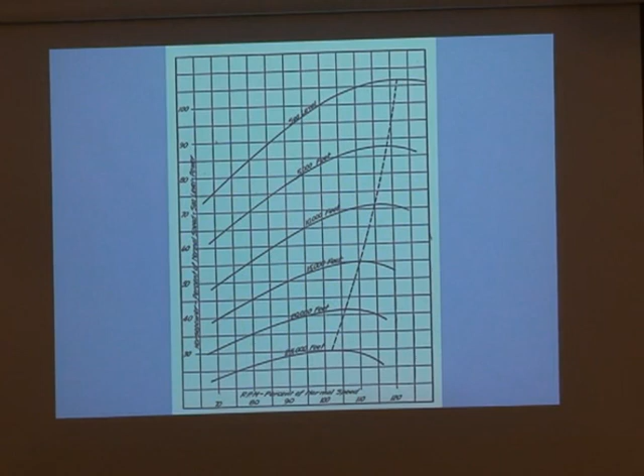Here in the UK, we have a very interesting pioneer. In October of 1909, George Mort in Willesden, a borough of London, was doing engineering for the New Engine Company. He lodged a patent on a two-stroke engine. I know you're familiar with the difference—a two-stroke has a power pulse every revolution, as opposed to the four-stroke where you have a pulse every other revolution. It's a quite sophisticated two-stroke concept.

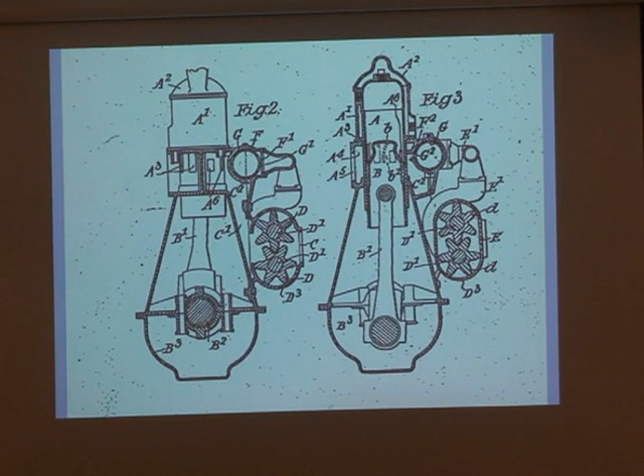One of its features is the use of a blower, akin to what we call a roots type blower with intersecting lobes. It looks a little bit like an oil pump or something like that, but you can see the blowers there at the side of this engine. This is a concept that Mort brought into the metal in an aviation engine.

His actual engines, starting around 1910, had 4-lobe rotors. So you saw in the patent days he had a 6-lobe rotor, but he used that—this is quite an efficient roots type blower with four rotors, in fact.

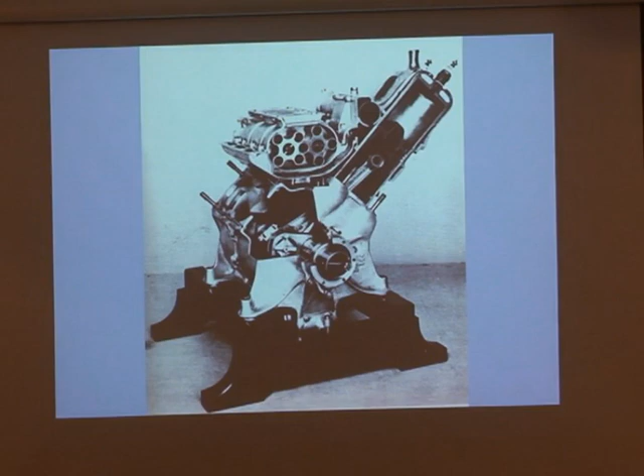The engine was very sophisticated in that Mort used the blower to bring air into the engine, initially to scavenge the gases from the previous stroke, and then he used a rotary valve to pump a rich mixture of air and fuel into the engine at the very last part of the induction stroke. So the rotary valve played an important part in the way his engines operated. Here's another view of a cutaway NEC engine.

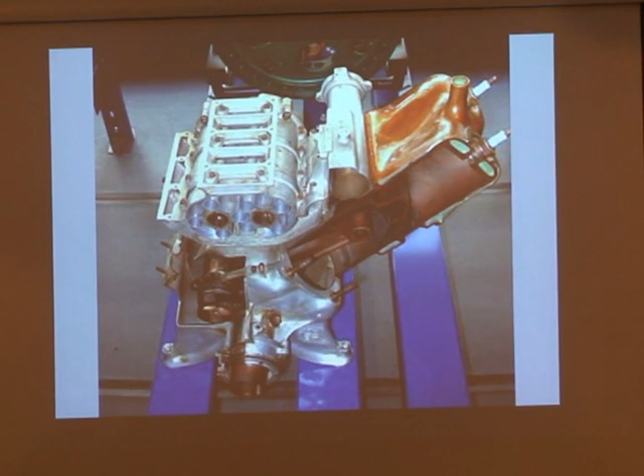Mort and the NEC produced engines of a number of different types in the years running up to the war. They had inline configurations—we see an inline 6 here—and he had 4s in V and inline versions. These engines developed power from around 40 to around 100 horsepower. A very interesting early use of a blower.

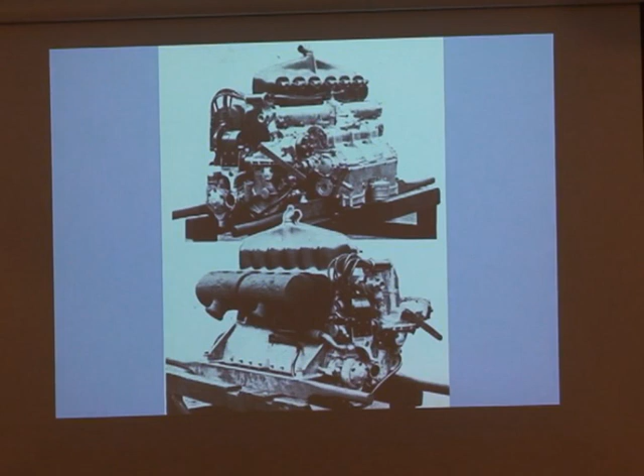There was some supercharging effect from the way the ports and the rotary valve were organized, but not a lot. The objective of the blower here was not supercharging per se—it was for the performance of a two-stroke engine. But as you can see, a very sophisticated and interesting design. The engines did get some use, but the war intervened, and Mort's engines were too small, really, to be important in military terms.

So he produced power units, parts for power units for other manufacturers during the war. Now, around 1915, as the war got underway, it became evident to people on the front that against the German aircraft of the time, the Allied and British planes were viewed as Fokker fodder. The Fokkers were too tough. We couldn't get to grips with them.

And one of the ways in which Britain's engineers thought to deal with this was to start thinking about a supercharger of some kind. This work was done by the Royal Aircraft Factory. Britain at that time had a government company which designed and produced engines and aircraft for the military as a national activity, and to their credit, the engineers there looked into various different ways of providing a supercharger.

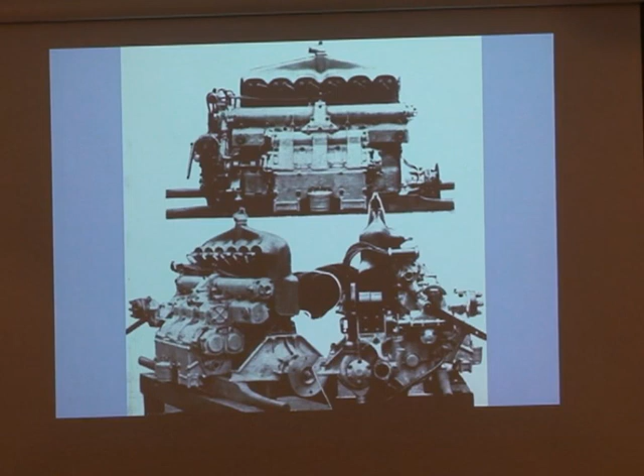Now, the centrifugal type supercharger has the advantage of being very efficient. It runs at extremely high speed relative to a typical aircraft engine running at 2,000 RPM. Your centrifugal blower will be running 16,000, 24,000 RPM, because it gets its pumping ability from the inertia that it develops in the air that's going through it.

And so it's very peaky in its performance, which is historically why it hasn't been very interesting for cars or even racing cars, because it doesn't give much boost at low speed. But in an aircraft engine, which is running at a fairly consistent speed, a centrifugal supercharger is quite good because you can match the blower to the engine, and you're not going up and down the rev scale all the time.

But this is basically the blower that the Royal Aircraft Factory designed for testing on their V8 engine. That was designed by Jimmy Ellor. Jimmy Ellor, E-L-L-O-R, is a kind of leitmotif through this whole story. In Britain, he became an outstanding designer, creator of superchargers, and this was basically Ellor's first effort. You can see the step-up gears that are needed to get the supercharger up to the kind of speed that is necessary.

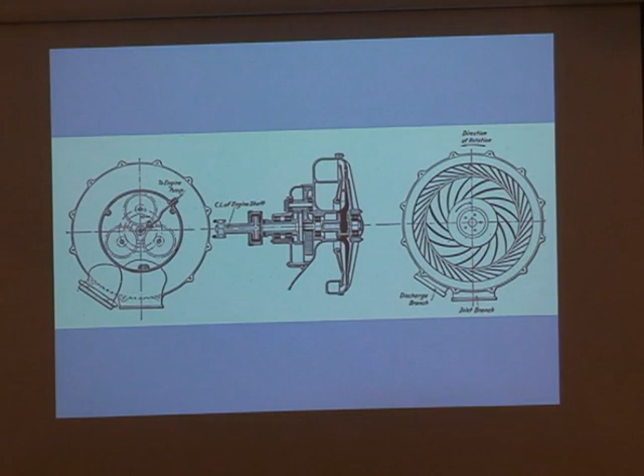In January 1916, this supercharger unit, driven by a shaft from the back of the engine, and I should add, blowing through the carburetor into the engine - the British decided that that was the best way to do it. The French didn't - sorry, let me correct that. At this stage, they were blowing through the carburetor.

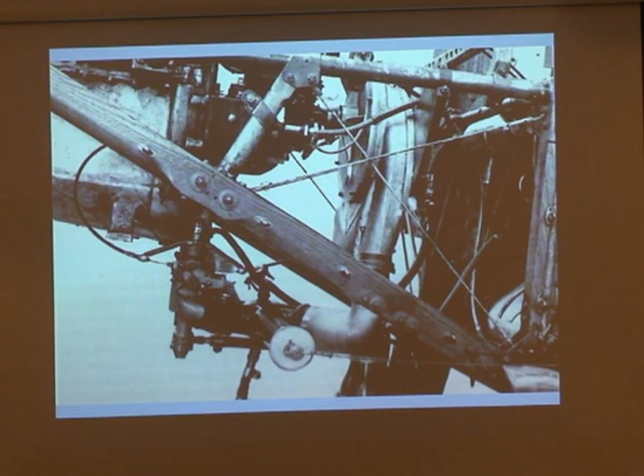Later, they changed that and drew from the carburetor, which is generally speaking the best way to do it. This shows the test unit in January 1916, and as far as I can ascertain, this is the first compressor-aided aircraft engine to take flight. Nobody - French, German, Italians - beat the British to this honor.

Sam Heron was another engineer involved in these developments, and he said the observer in the BE-2 biplane sat in the front seat with his feet under the fuel tank. The gear drive for the supercharger was also close to Eller's feet, as you can see here, the observer. The gears were quite inadequate and the pinion failed in flight, producing showers of sparks and a feeling of distinct concern.

They were discovering that the inertia, because of the high RPM of the centrifugal blower, was substantial, and that in fact the task of driving it was no less demanding than driving the propeller of the airplane. So this is something that took a little while to sink in, that this was something that had to be paying attention to.

The British, at this point, were pretty much committed to mechanical drive of the centrifugal blower. In France, Auguste Rateau had been a terrific pioneer of turbine-driven centrifugal blowers for aircraft. In fact, he was really the first to build small turbine-powered units for aircraft use, using the exhaust of the engine to drive the supercharger.

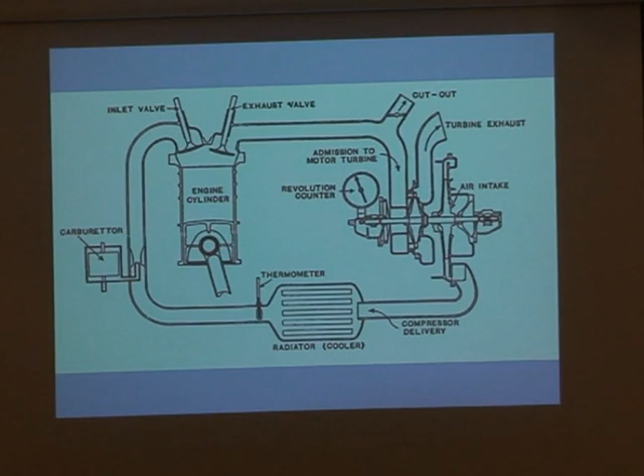Now they had this practically ready when they found out that Rateau had some equipment available that they could use. So they commenced testing with a Rateau system. Rateau was pretty happy to let them do that. He said he'd like them to do it in France, and then they said no, we prefer to do that at home. They did carry out testing with the Rateau system.

But there were problems. There were failures of the pipework, failures of the blower. There was another reason. One observer said one of the problems is that the festoons of red-hot exhaust pipe from each cylinder to the turbine were considered too alarming to the pilot. It was, in those days, quite a lot of pipework around. And the exhaust valves, of course, were suffering with the turbine back pressure and so forth, and the heat that was generated. So that represented a backpedaling by the British investigators. They decided that turbocharging at that time wasn't quite the way to go.

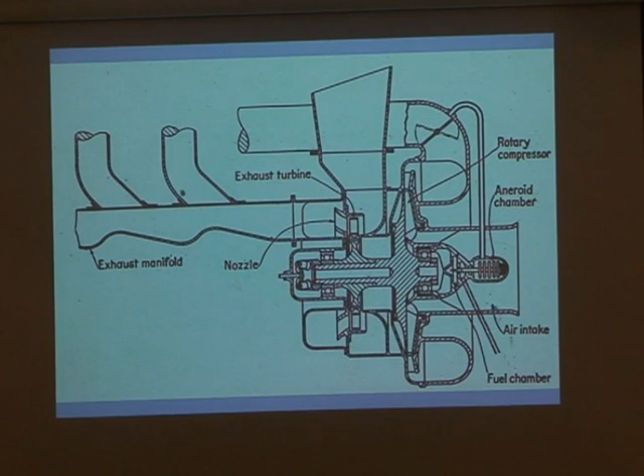We have another important pioneer. We all know the work of Harry Ricardo, a very important engineer in terms of new developments in technology, engines in particular. Ricardo went to the War Office with ideas about how he could make engines that would perform better at high altitudes and so forth. He said the officer he went to see listened to me very courteously, and then said he was afraid I was wasting my time. The Army only required aircraft for artillery spotting, the officer informed him, and for this purpose an altitude of only a few hundred feet was all that was needed. In fact, captive balloons were the answer, he was told. So Ricardo got a very dusty response from the Army at that time.

But he did complete a type of supercharging, which he himself admitted was not unlike something that Dugald Clerk had developed in the 19th century. He in effect added a stage below the main operating cylinder in which a pump effectively brought in, with a certain level of timing through ports at the bottom of the cylinder, and with a bit of an intercooler along the side, a form of supercharging integrated with the engine itself. He did manage to test this engine. He got a boost pressure of about one-third of an atmosphere, and significantly increased the engine's power from 21 to 31 horsepower. So it worked, which is not surprising.

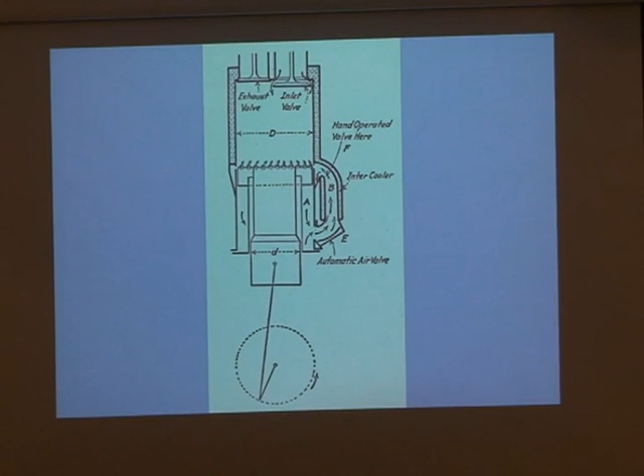The stages to put it into actual use were difficult. He had a project to do a V12 engine that didn't get done in any reasonable time. But at Beardmore, Frank Halford redesigned the company's engine to use Ricardo supercharging, and this did succeed in increasing power from 230 horsepower to 260.

One of the disadvantages for an airplane is that the height of the engine was daunting to the pilot, very difficult for his vision. They did produce ultimately an inverted version of this engine, which got over that problem. This didn't get into practical use during the war, but it was, in its way, a fruitful avenue for exploration.

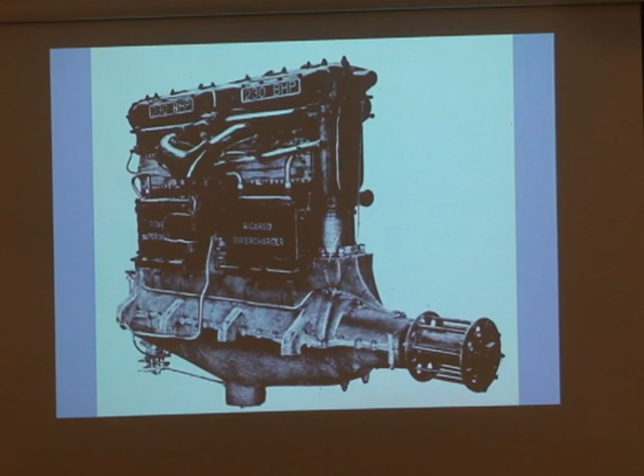Another player was John Davenport Siddeley. He was described as a man accustomed to having his own way, noted for being both energetic and somewhat autocratic. The Siddeley Deasy Company was working on aircraft engines during the war. After the war, a series of amalgamations led to the creation of Armstrong Siddeley.

In 1917, the Royal Aircraft Factory that I mentioned earlier was dissolved. This was not seen by the government as a really good way to be developing engines. Having a government body that was both designing and producing them, they thought it better to rely on aircraft engine producers, get them to do the work, and do research at Farnborough, where they were based.

When that happened, Frederick Green, who had been leading the effort at Farnborough, and Sam Heron, whom I mentioned earlier, brought to Siddeley a 14-cylinder, two-row radial engine that they created at the RAF, Royal Aircraft Factory, which at that time, 1916-17, had a built-in centrifugal supercharger. So they hadn't really completed the engine, wasn't fully tested, but it came to Siddeley.

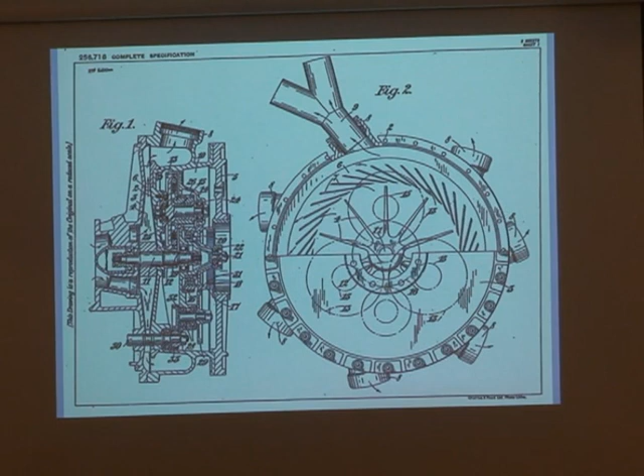This was the first engine to be made commercially available with built-in supercharging by anybody. It was a very important pioneering effort by Armstrong Siddeley. Just a couple of details of the design.

This shows the input drive to the blower from the engine. It's a kind of nest of inner and outer gears and pinions, which were designed to accommodate any difference in angle or position of the elements of the supercharger in the engine.

Slipping clutches were coming into use because it was evident to designers, after much tearing of hair, that it was necessary to have some form of device that allowed slippage in the drive line up to a centrifugal blower. You can see 4 different clutches, spring-loaded, but aided in their grip by centrifugal forces, and the planetary drive for the blower in this Jaguar engine had these clutches in all 3 of the epicyclic drive to the blower. Quite an intriguing piece of engineering.

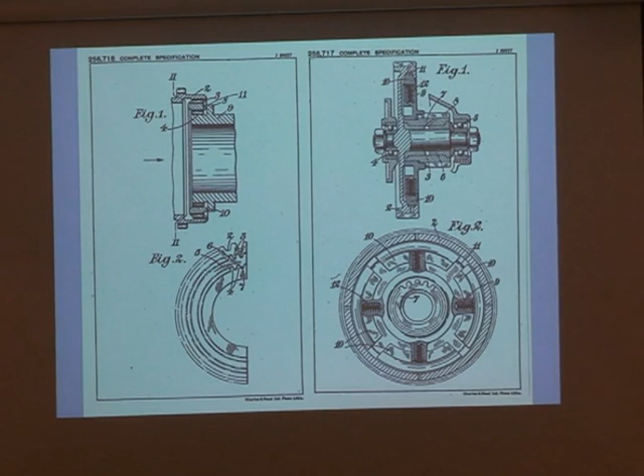Again, Jimmy Ellor was the author of that. And that's the resulting Jaguar engine, the first production engine to have a supercharger from any country in the world. This was the Jaguar Major, rated at 400 horsepower at sea level and 500 horsepower at 14,000 feet. This was terrific, very useful, and a pioneering result for Armstrong Siddeley.

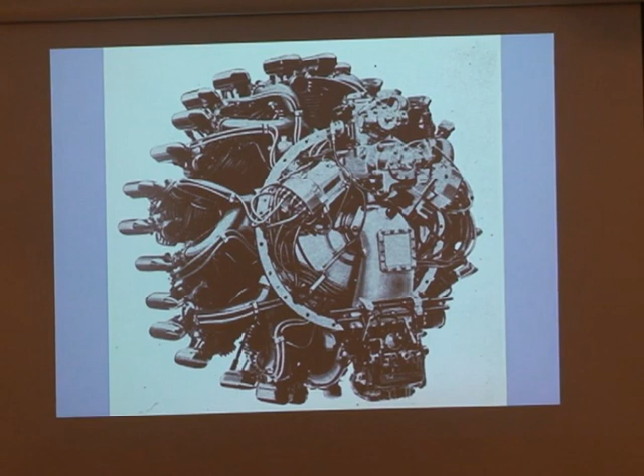But somebody else was interested in these developments: Roy Fedden, another but quite different kind of hard-driving executive engineer, chief engineer of Bristol Aeroplane Company, makers of both aircraft and engines. He wanted to see what the problems were with the turbine-driven supercharger. The RAF had dropped it, but was it that bad, or what could be done? In fact, the Royal Aircraft Establishment, as it was now named, did carry forward after the war some research into turbo-driven blowers.

The first result of that was a marriage of a Bristol Jupiter 3 engine, a 28-29 liter, 9-cylinder engine, with a turbocharging kit attached at the back, again the work of Jimmy Ellor, now at the Royal Aircraft Establishment.

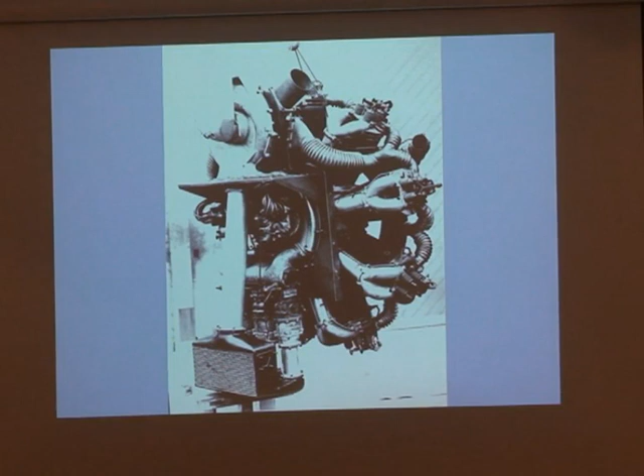You can see here the blower is up at the top, with the exhaust coming out there, blowing down through an intercooler and then up through the carburetor array into the engine. Another view from the side shows how that was laid out. It was a very early adaptation, a little less elegant than you would hope, with quite a bit of exposed bits and bobs.

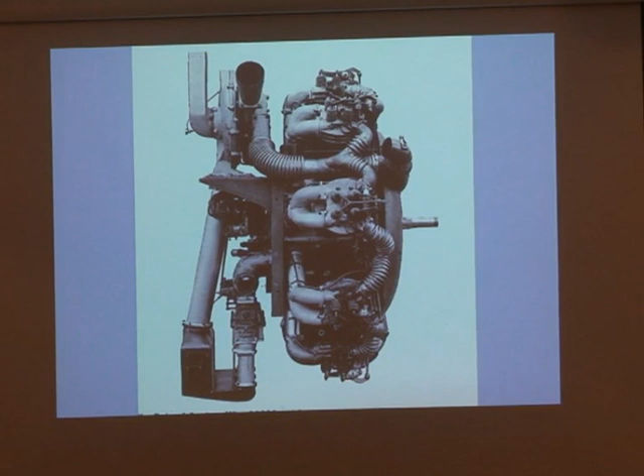This was tested by the RAE. The installation was made by Bristol in what was called a Bristol Sealy biplane, a unique airplane Bristol had built for the competition. It didn't win, but they had it available, so it became the test bed for this turbocharged engine.

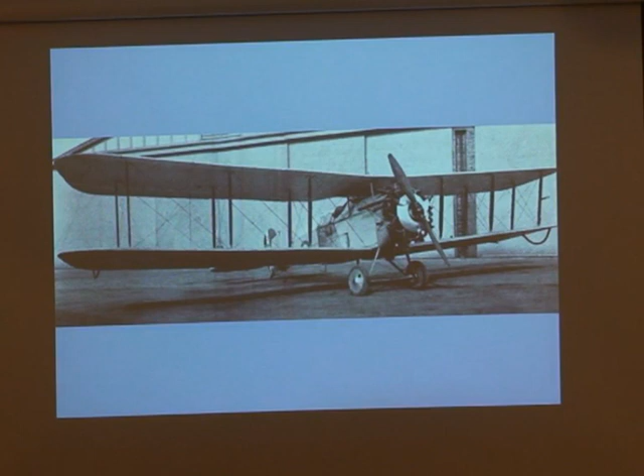The Air Ministry bought this from Bristol in December of 1923 and carried out tests with it. Here again you can see quite visible the exhaust from the turbocharger in the Bristol Sealy. One advantage of the Sealy was that it had an enclosed observer's position, which for work at high altitude was seen as quite beneficial.

The turbocharging raised the service ceiling of this aircraft to 23,000 feet, 6,000 feet higher than it could normally achieve in service level flight. This was extremely promising, so the Air Ministry said, let's build a developed version of this—this was just a test bed, let's go further.

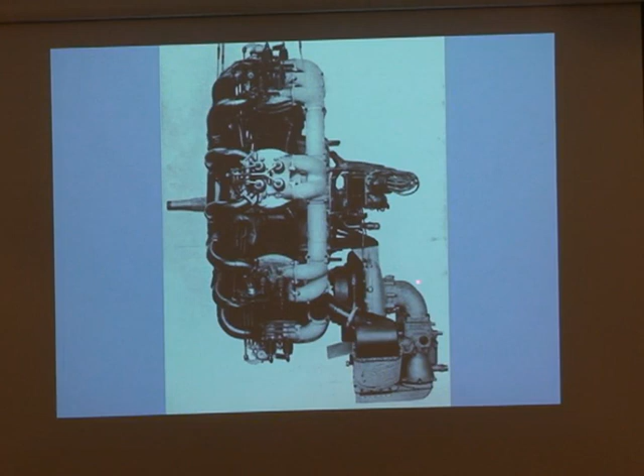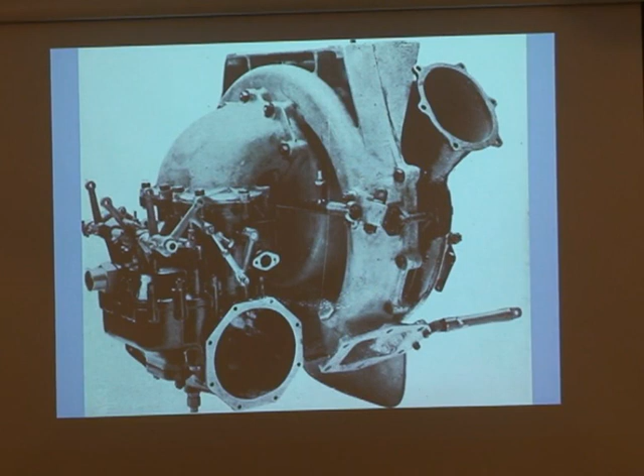The first one, as far as I can tell, was a kind of test bed, a mule based on the previous engine for this later version, but much more compact with the blower now mounted low down at the back, going through the intercooler and so forth. This is the turbo unit itself, developed jointly between Bristol and the Royal Aircraft Establishment.

A look at the components: the turbine is at the left, of course, with a little cooling fan inside it, and the blades of the compressor toward the front.

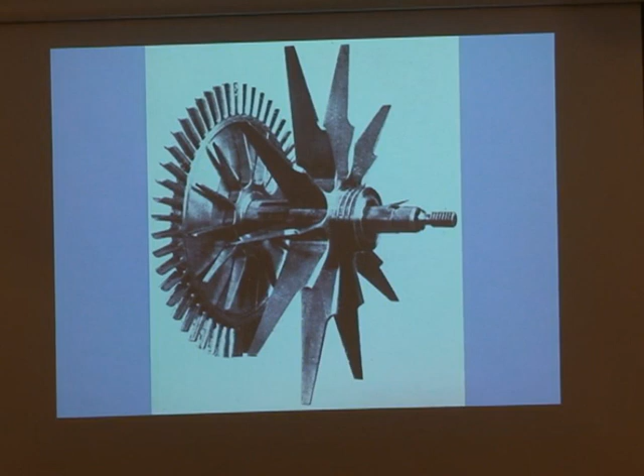In its final form, this was the Orion, based on the Jupiter of 1928. It was tested in a Gloster Gamecock fighter and gave excellent performance, extremely good climbing capability, 495 horsepower at altitude, 20,000 feet, and so forth.

But there were problems—difficulties with the turbine wheel rubbing against the housing. There were certain problems which really would be regarded as normal development problems, but the Air Ministry, based on these findings, stopped work on turbocharging for aircraft.

A quote from aviation historian Bill Gunston: "In retrospect, it may have been a mistake to give up so easily. Fedden had too much on his plate, and in any case could not fund development himself. At the national level, a fully developed turbocharger would have been a great advantage in the Second World War." This simply reflected the complete short-sightedness of the government in not appreciating the importance of such work.

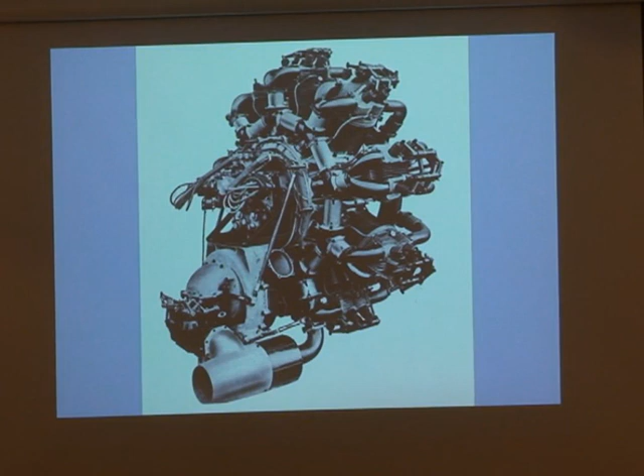Fedden, in the meantime, in parallel with this—he's a very active guy—was developing a mechanically driven supercharger. He first did that for a smaller racing engine, and with the information gathered from that, he applied built-in centrifugal blowing to the Jupiter, resulting in the Jupiter 7, which the military could have used and obtained from 1928.

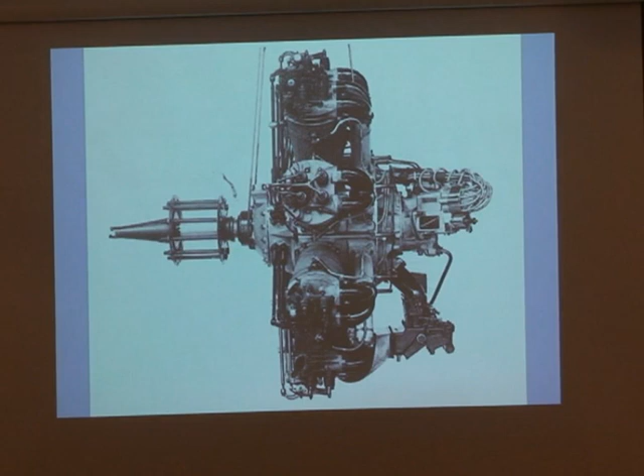They first ran in April of 1927. Here's a look at the innards of the Jupiter 7, with the blower very neatly nestling into the back of the engine, in a good position to deliver an air-fuel mixture out in all directions to the various cylinders. So this was a very neat and attractive way to build an engine.

Here we find Bristol racing away from Armstrong and Siddeley. Armstrong and Siddeley were first to have an engine that they were building in quantity for sale with a supercharger, with full supercharging. And the Bristol team, on the other hand, had the Jupiter 7 supercharged.

Built radials that were used around the world. Why did Armstrong Siddeley not capitalize on its advance and its advantage? Sam Heron, one of the engineers involved in this period, said Bristol had an extremely aggressive development policy, whereas that of Armstrong and Siddeley was anything but aggressive. So Roy Fedden against John Siddeley, there was no contest.

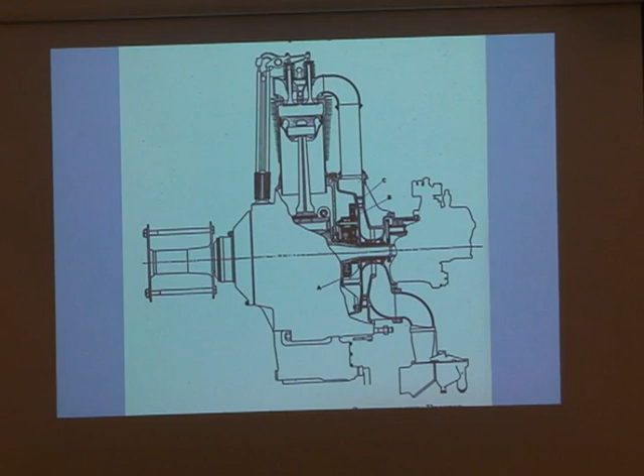In fact, one of the French air salons around this period was described by one of the French publications as the scandale of Jupiter, because 70% of the European airplanes on display had Jupiter engines. So, bang, Fedden, Bristol, and Jupiter ran away with the prize.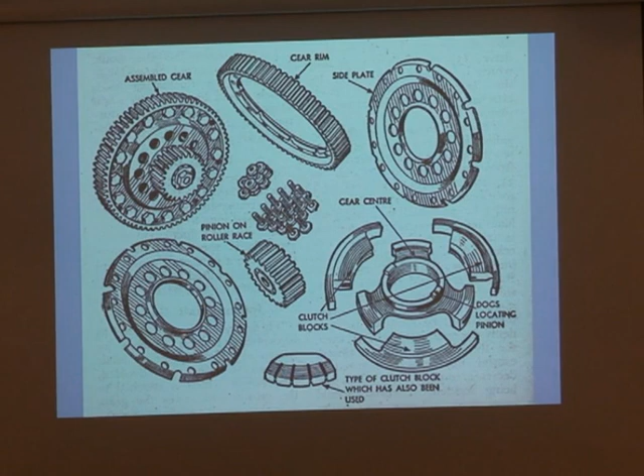Just to look at a couple of details of the Jupiter, you can see one of the clutches—again, a clutch to allow some slippage in the drive when it occurs. An exploded view of the blower itself. You'll see quite a few aircraft engines of this period which look like they're supercharged, but it was quite a popular thing to have a kind of rotating fan at the back, not geared up very highly, as a kind of stirrer-upper of the mixture.

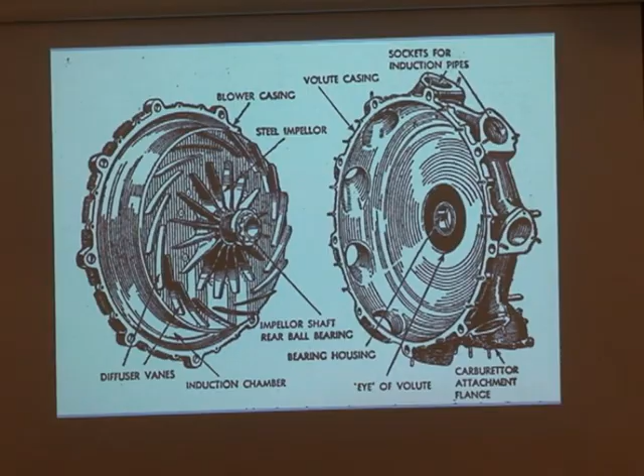That made for better distribution of the mixture among the various cylinders. But when properly geared up, it's quite another story. And here are a couple of cutaways of the supercharging unit on the Jupiter.

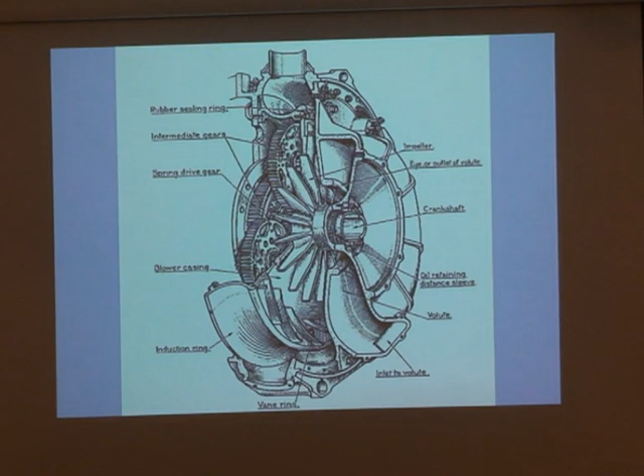Can I ask you maybe—sure. Pushed out to... yep, that's good, I don't want to do it, but... that's good, no, that's fine. Another view of that, we'll look at the unit. Let's see, where am I? Okay.

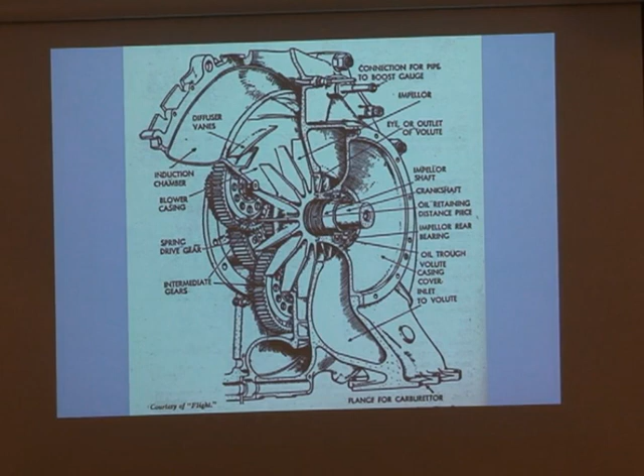Hugo Junkers was very interested in exploring high altitudes, again to try to verify the concept that flying high was more efficient, with less fuel consumption and better speed, with the help of supercharging. So he allocated one of his W-34s to high altitude research—he really wanted to see if flight above 12,000 meters really yielded important advantages in efficiency.